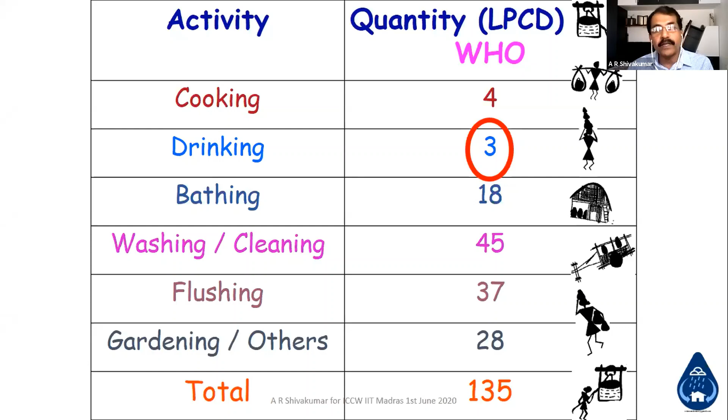We need to worry about approximately 100 to 135 liters per capita per day, and in particular 3 liters, which is for drinking, which needs to be quite clean in both quality and availability for every person on this earth. Of course, water is not just for human beings -- all other creatures on this earth will also share it.

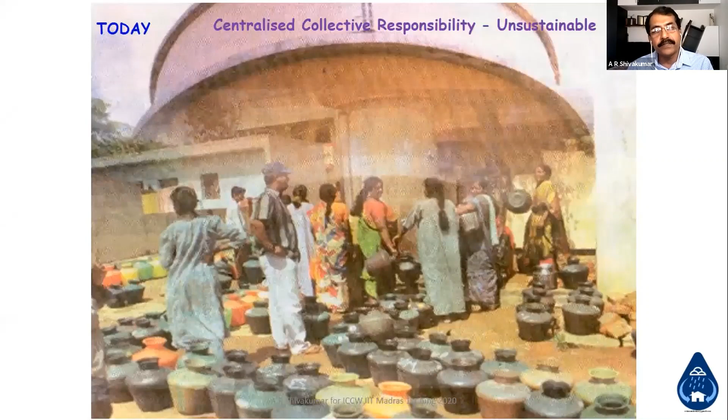This was what we had -- water was our own responsibility, and we used to go to the place where water was available. It was the most decentralized and sustainable system which we had. We moved on to large centralized systems as civilization grew, and many a time it has become unsustainable. Now we have water as a commodity, and in most places we have water dispensers or water ATMs, which we have already started seeing in most towns and even villages.

Is there something we can do to have a sustainable water supply and respect what we had earlier? Can we bring it back to that? Nature has given all the gift of water available to almost everyone, including all other creatures, and it's in plenty. We just need to manage it properly so that it is equitably distributed among all, where it is needed, in the required quantity and quality.

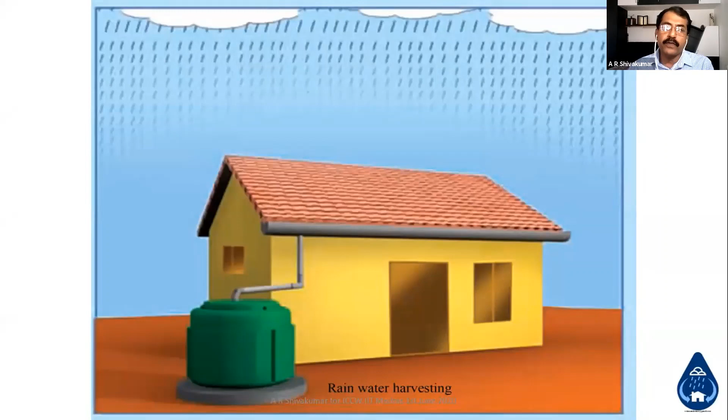Rainwater harvesting is as simple as this. We start with a collection place -- our own building roofs. The roofs are more cleaner compared to all other catchments we have, so we start with roof collection. Whether it's a flat or inclined roof, the water flows down; instead of allowing it to go out, we can collect it in tanks. Excess water, instead of allowing it to flow out, we can recharge to the ground. Why recharge? Because we have been using groundwater very extensively.

In particular in India, almost every place we have exploited the groundwater. Unless we recharge, naturally it was happening and now also it's happening, but the quantity of withdrawal is so high, we need to use artificial or accelerated methods to see that the water percolates into the ground.

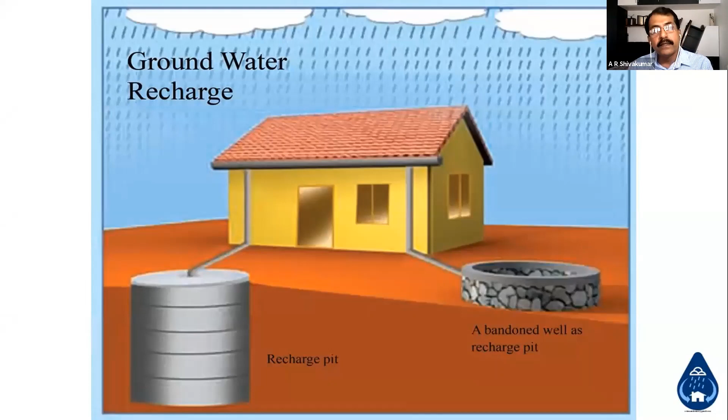An old abandoned well is a classic example. You allow your roof water to go into that, it will recharge. Or we can create one recharge pit or a well, which I will show you in future slides. And the rainwater would be the immediate resource to augment the existing water supply system.

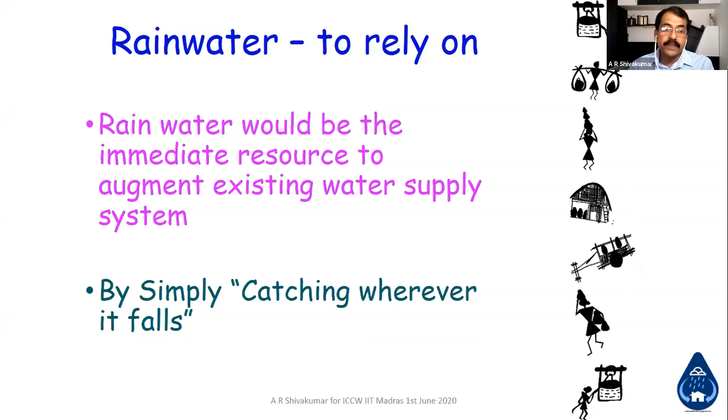We can't move away from the developments which have already taken place. We can see how we can augment and see that sustainably everyone gets water by simply catching where it falls. Rainwater harvesting methods, broadly we can divide in any of our civilized either urban places or in the rural places in 3 categories.

Rooftop rainwater harvesting, runoff from various places like landscapes, parks, stormwater drains, roads, etc. Here also we can harvest either for recharge or for reuse. Natural storage and collection through lakes and tanks or water bodies is very important. This will complete more or less the rainwater harvesting.

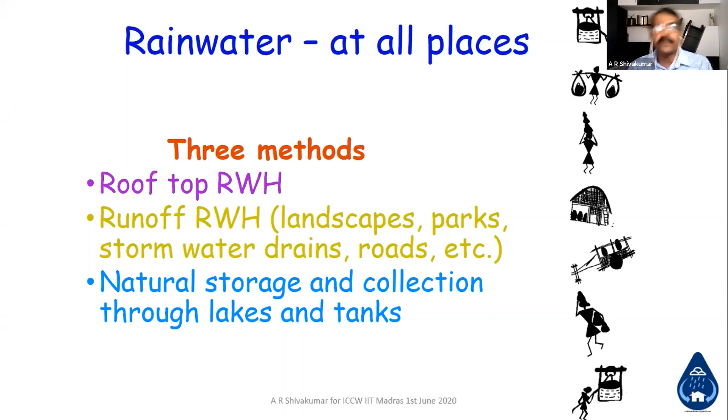Any rainwater harvesting system will have 4 categories of steps. One is the collection - we need a collection place, either a roof or an open ground or a park or a large industrial area. Then we need to channelize that so that we can filter and use it. Filtering is very important - depending on what kind of usage we have, we need to filter to that quality.

For just agriculture purposes, we just need to filter some debris which can flow through the pipes and pumps and the irrigation system. If you need to use it for drinking, it should be potable. If you are using it for industrial purposes, the standards are different. So filtering is something which is very crucial.

It plays a catalytic role to see that the rainwater, though it is pure, gets contaminated or mixed up with other contaminants on the collection areas or the catchment areas, and needs to be separated. Then afterwards you have 2 choices - one is store and reuse, or you can recharge to the ground. Or a combination of these things can be used so that partly you store and recharge to the ground.

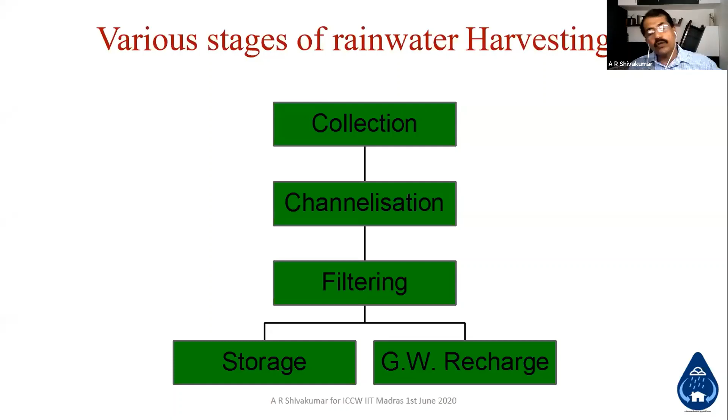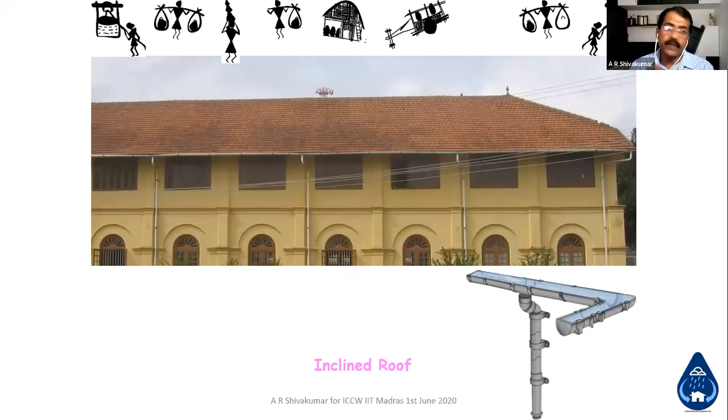We can store or collect it from an inclined roof also, whether it's a tile roof or sheet roof or any other inclined roof - we need to collect using gutters and pipes. Even the flat roof we can collect, bunch all those downwater pipes and take it to one place to collect.

And how much water can we collect? Simple calculation - basically you need 2 figures. One is the catchment area of the collection place and the rainfall of that particular place. If you want 1 year's total requirement, how much you can collect or the total potential, you just need to multiply the area by rainfall. Area in square meters and annual rainfall in millimeters will directly give you the liters of potential you have.

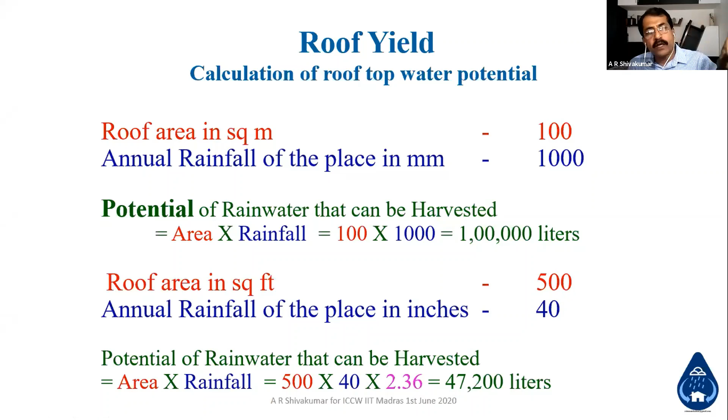In feet also you can do it - only thing is it should be in square feet, inches in rainfall, and a constant of 2.36 will give you the total quantity of water we can collect. Whether it's a small house, large industry, or a catchment area of several acres, the formula is the same. We need to bring in a factor called efficiency of collection, because what is potential and what is actual differs - what is potential is theoretically how much it can rain and how much you can collect from there.

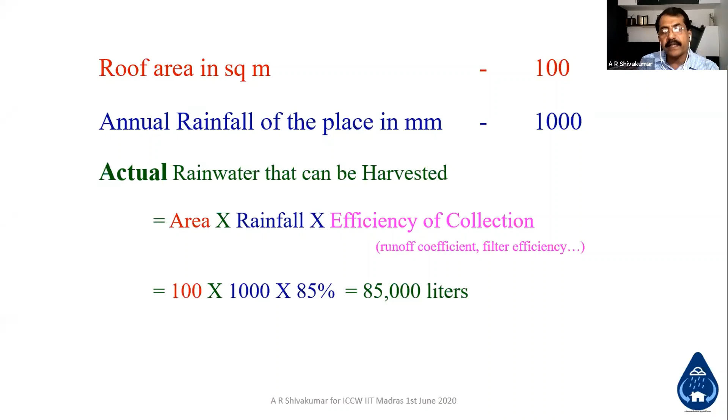Practically, where it comes to storage for direct use or for recharge, it depends on the efficiency of collection, like runoff coefficient, filtration system efficiency and all that. Roughly for a building with a flat roof or inclined roof, which is a hard surface, you can safely take 85% collection efficiency at this level.

For a small building, rainwater collection can be as simple as this. You have your down pipes, the water comes down. The first flush is very important. Once you remove the first 3 to 5 minutes of water from your roof, your water is almost clean. Then whatever debris comes can filter through a cartridge and come to your storage place for you to collect and use.

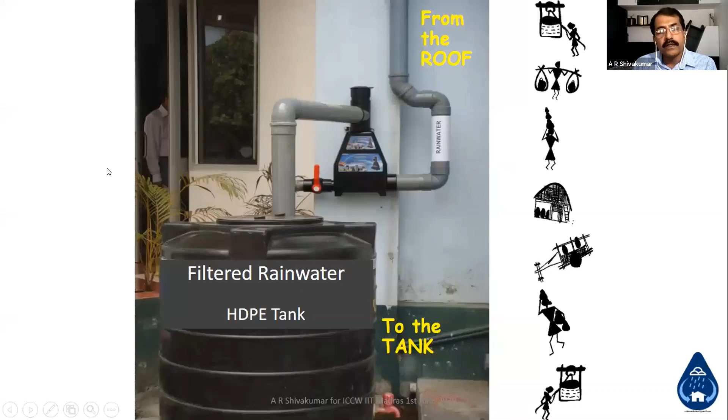As simple as this. The next slides will show you how simply you can collect from any normal building. You have a building roof and the down pipe, and the rainwater is flowing away. Just interconnect them using a pipe. Then connect a filter which will remove the dust, bird droppings, and leaf litter that have fallen on the roof. The water is then diverted after filtration into storage. That's all you need to do. Very simple, anybody can do it.

Whether it's a multi-story building, an apartment, industry, or any other such building, here the system required needs you to know the total quantity of water flowing. So we need a little hydraulics to worry about flow rates, pipe size, filtration system size, and what kind of filtration you are going to use. After that, you can also store and recharge groundwater.

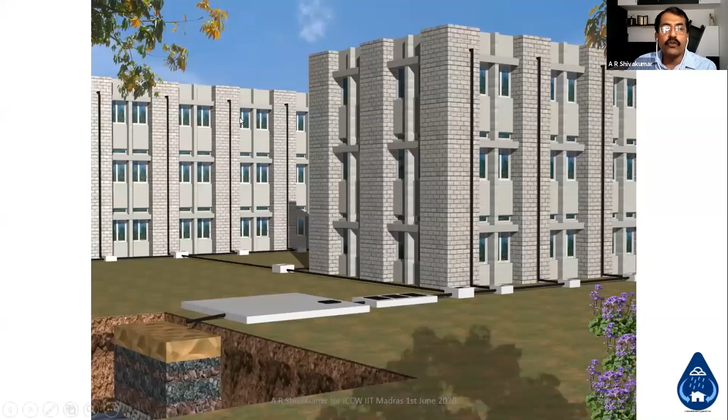A simple diagram can show you. Basically, the rainwater has to flow by gravity from the collection place to the storage or recharge point. So choose the place of filtration and storage at the lowest portion of your project, house, or wherever you want to do rainwater harvesting, and systematically lay the pipelines with a gradient so the water flows down, with a high volume filtration system for large buildings, and then storage.

I have developed both a domestic pop-up filter, which is serving across the country, and a totally automatic system for very large scale systems, which I have also demonstrated. This is for a very large system, like government secretariat buildings, large hostels, airports, or the IT sector, where large quantities of water are brought to one place. We have a totally automatic filtration system which I have developed, called the first flush lock and diverter.

Later it stores in the tank. What it does is, every time it rains, this particular tank stores the first few minutes of rain, maybe 3 minutes, with all the contaminants, and there is a lock which locks by itself automatically and diverts the subsequent cleaner water through a pebble bed filter into the tank.

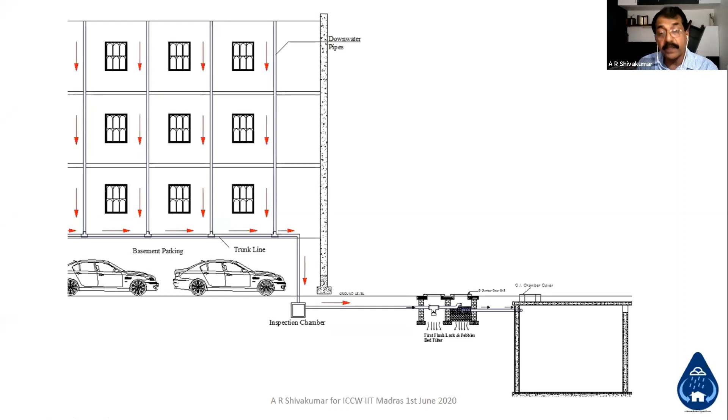How is this automatic? Once the rain stops, all the dirt and water stored in this first flush lock percolates into the ground, because the bottom is not concreted or cemented. The valve opens, and it's ready for the next day, or after a week, or after a month, whenever it rains again. It's totally automatic - you don't need to clean or do anything. It's working very well at various places, including all the hostels of Anna University campus in Chennai and various others.

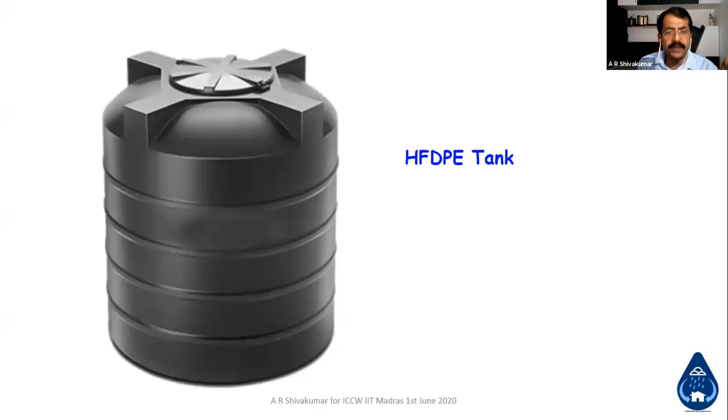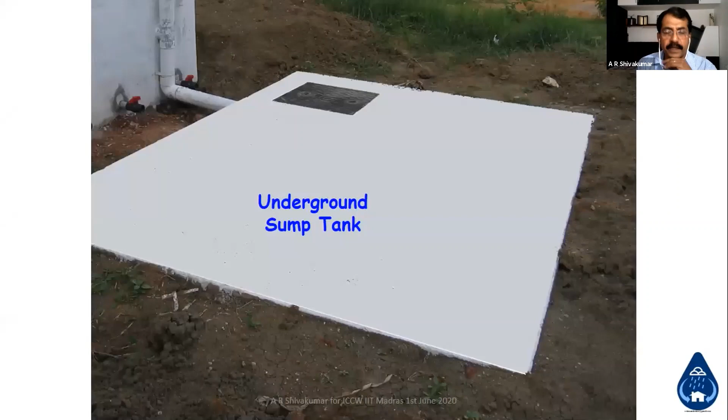Storing rainwater can be done in various forms. One is the HDPE tank, which is simple but can store up to 5,000 liters. Beyond that we need to go for either a masonry surface tank or underground tanks. These can be built using brick or cement concrete. I was part of a very large program in Karnataka where almost every rural house is being built with a rainwater harvesting system.

What we have given is basically a collection system and a first flush valve. Then we have a sand bed filter, and the water goes through this. Below this we have a jali where the water percolates into the tank after filtration. This tank is totally sealed so that the water stored in it is not exposed to the sun.

Even after several months, water is safe to use and they are using this. I can say this is the happiest family. They generate their own water from their rooftop, get it filtered, store it here. They have the cleanest form of water. This tap has a lock so that every day they withdraw only around 10 to 20 liters of water for drinking and cooking. Otherwise, they use hard water or contaminated water available from borewell and various places.

Even in large-scale school programs we have done this, where the roof water is collected, filtered and stored for drinking purpose in the school. Now let's come to groundwater recharge.

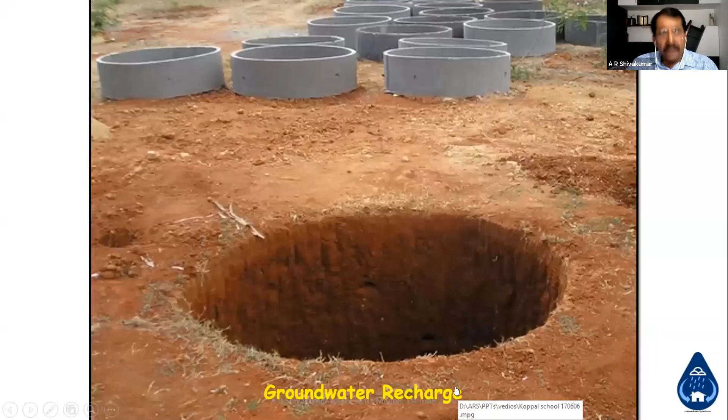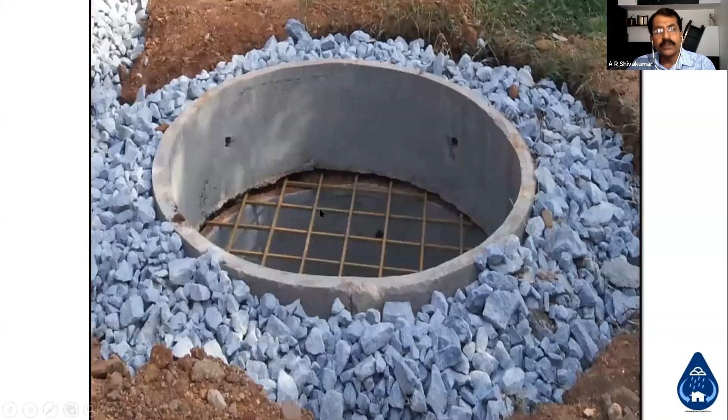Groundwater recharge is a very simple process. We dig a hole in the ground and we have precast cement ring wells. This is the cheapest and best method we have seen. Of course, depending on the region, there are different methods adopted. We construct a well using these cement precast rings, with no plastering between two rings, and a safety mesh at the top before the last ring is placed, with a disc over that.

We allow the rainwater to go inside this if it is filtered. If it is surface flow, we allow it to go into the annular space. So what we should observe is this entire well is empty - there is nothing filled in that. No filter media, sand, charcoal or aggregates are required. We only need to worry about the annular space outside, which is filled with aggregates.

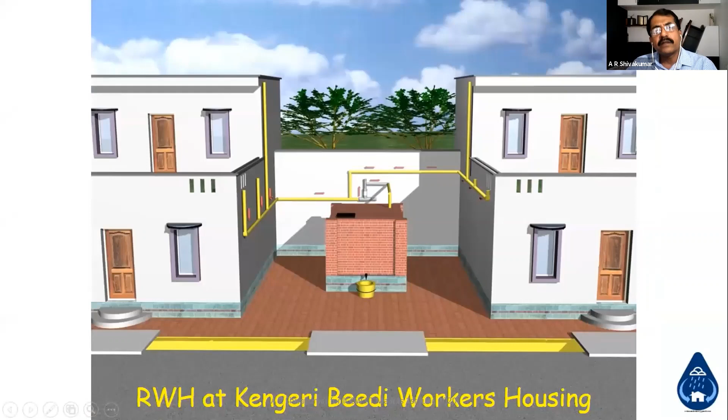Even in large economically weaker sections, slums and other places, rainwater harvesting is practiced. We collect the roof water, filter it, store it, and use it for drinking purpose and everything.

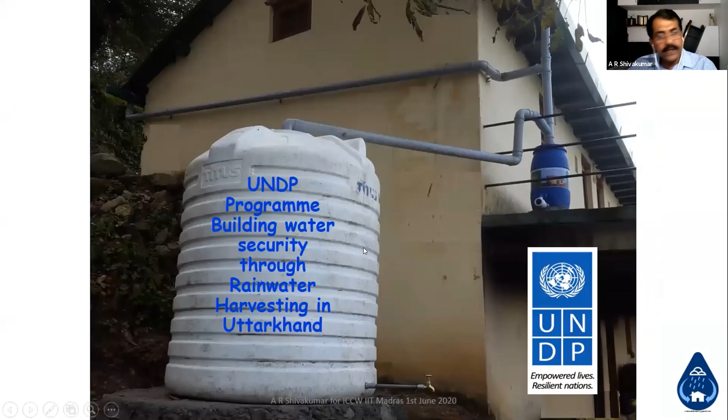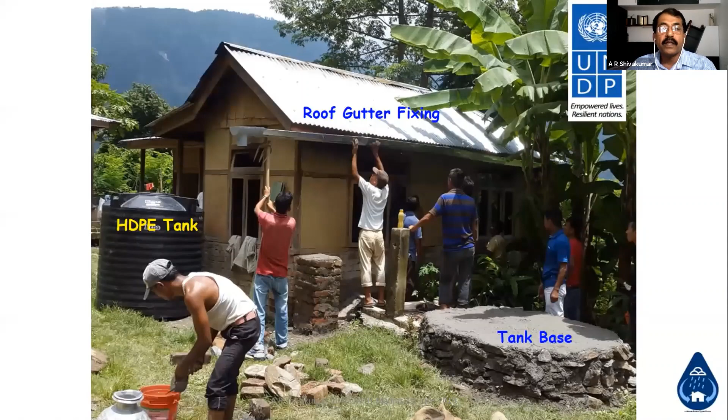As part of large programs with the United Nations Development Program across the country, in Uttarakhand we have developed systems in the Himalayan region and other places where roof water is collected, filtered and stored and used for drinking. We have trained skill development programs to impart training to those people so they can build this on their own. These are the happiest moments, when these people have found water just beside their house and use it throughout the year for drinking.

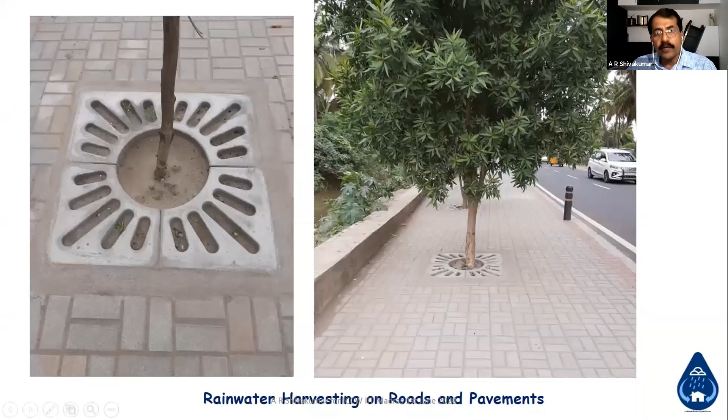Rainwater harvesting is not complete only with buildings - tree-based basins can also be part of pavements like footpaths and others, where percolation can happen. It can be as simple as collecting water with a dhoti or a sari on your rooftop. This is the purest form of water you can get.

Let us see how practically we can do this. We have developed an app in collaboration with the United Nations Educational, Scientific and Cultural Organization, UNESCO. I spearheaded this program in collaboration with the Indian Institute of Science Supercomputer Division and NMIT. We have developed an app, and today I'm going to demonstrate this app and how it works.

Basically, this app stores a large amount of data, which is the daily rainfall data of that particular place - 586 towns and cities across the country, from the northeastern states to Kanyakumari, western places, and north too, all collected from the IMD. That data is stored in the supercomputer division of our IISc. That, plus the software working in the background, gives you all the necessary inputs at the click of a button.

This is the app called RWH Advisor. Basically, we need to enter only a few things, very little. Anybody can enter it - your name is optional. For example, Chinnaswamy is from India, in Tamil Nadu, and you enter the district, and if you know the taluk, you can also type the taluk. If you enter this, automatically the entire view shifts to that particular place.

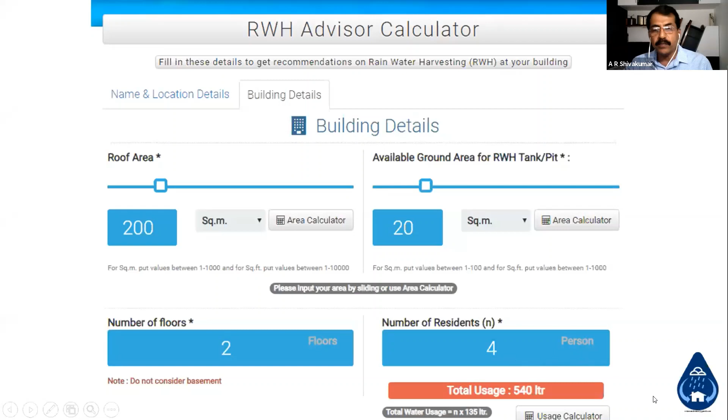This Erode, when we click on the button with these details, will give you this data. These are the results - this will show you the rainwater potential in that particular place where we clicked is 133,000 liters in the roof area of 200 square meters.

And the suggested most optimum tank size is 10,000 liters. If you build a 10,000 liter tank, in a year you can collect, with an efficiency factor of around 85%, close to 60,000 liters of water. For 111 days, it can say that you don't need any other water - rainwater alone can sustain you.

30% of your annual requirement is met from rainwater by having a 10,000 liter sump. 8 days in a year your sump will overflow - this will also show you when it overflows.

It predicts basically how it has behaved in the last 50 years of rainfall in that Erode or whichever place you have taken, then works on that. There are around 40 rainy days in that place. It also shows that the excess rainwater overflow can be put into groundwater recharge.

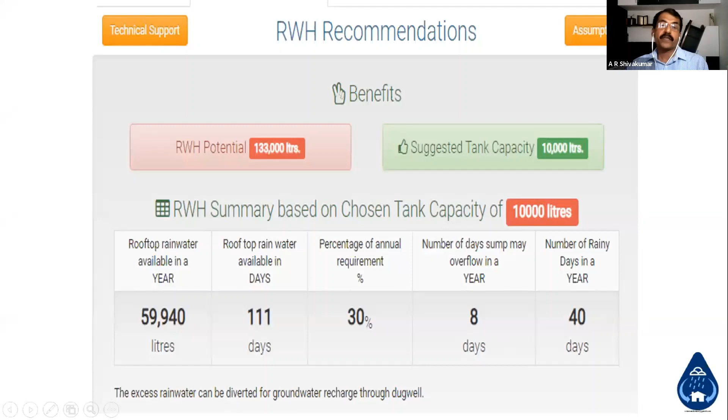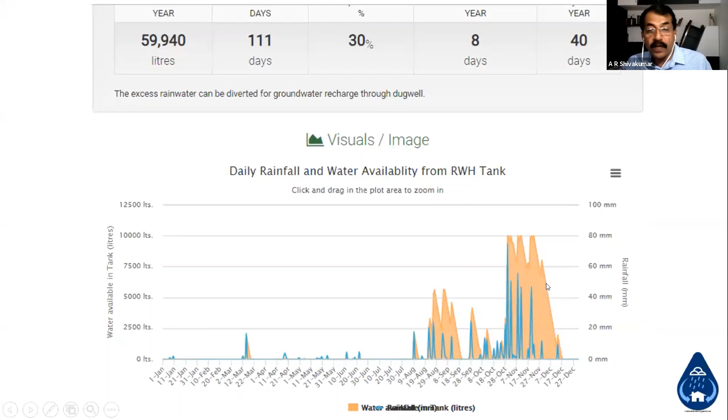And it will also, when you move on to the next, show you what tank size has been suggested. In this tank size, how many construction options you have.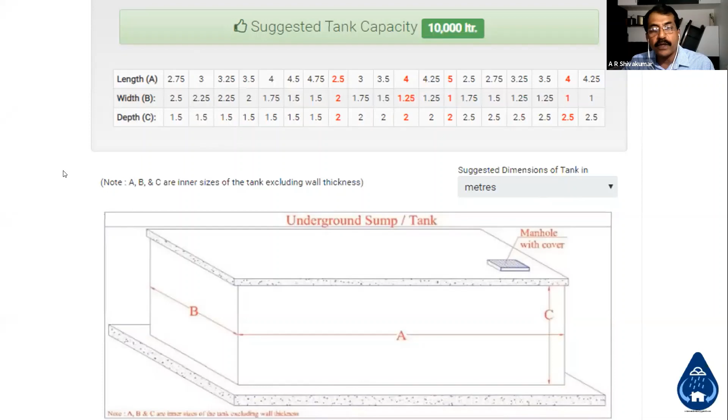Now if the tank size suggested is 5,000 liters or less, it suggests you should not build - it's not required. You can go in for an HDPE tank, which is cheaper, like 5 to 6 rupees per liter. Otherwise, if you go for brick masonry, which is between 5,000 to 25,000 liters, only burned brick chamber construction can sustain, up to 25,000.

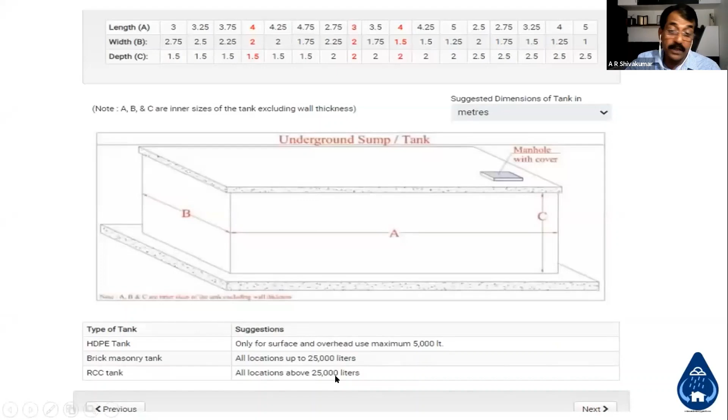Beyond 25,000 liters, you need to go for RCC tanks. This is what the app suggests, and afterwards it will also give you the cost.

This cost is basically derived from running through several costings across the country in various places. Some things are very standard, like pipes and filters, but labor varies a little. Depending on that, the app chooses the data from its background and starts working.

The number of downtake pipes is 4 in this particular building for that area. 110 millimeter is what is suggested. If they use bigger or smaller, I think this will be the right one as per the Indian building codes.

For the number of filters required, I have taken the pop-up filter which I have developed. There are many other brands which can be used depending on the manufacturer's guideline, what size of roof it can handle and how much water can flow through that. You can figure that into the design and factor it in.

The tank cost will give you how much it costs. The brick masonry tank is approximately 9 rupees per liter, around 90,000 rupees. Then the piping cost for the number of floors we've chosen, the total pipes, and the filters, plus the labor cost, comes to approximately 1,25,000 rupees required for this.

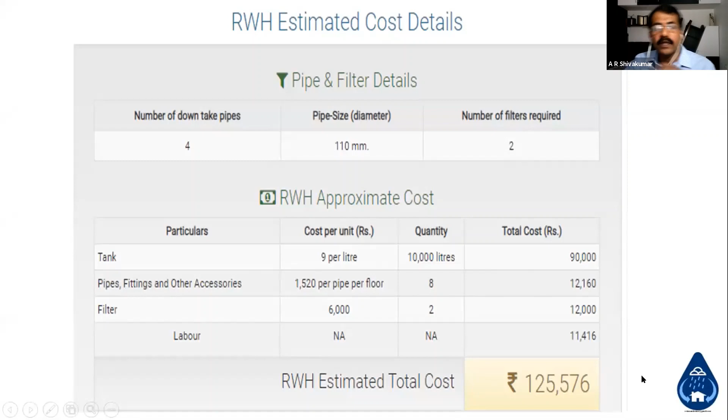Next, you have many options. If you go back to our earlier slide, I showed you the option now for storing and reuse. You can see this button in our app. If you choose store and reuse, as I said earlier, this navigation will come up and you can choose.

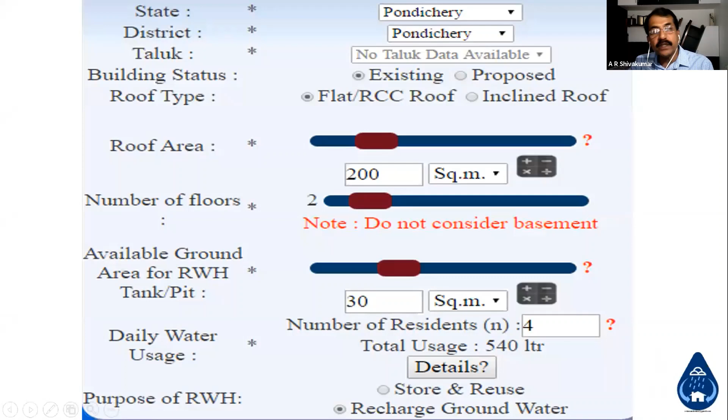Suppose you click on recharge, if you don't want to use the rainwater directly, you can go to recharge groundwater. This option will come up, and once it does, how to recharge it depends on the place, the particular soil structure, and various other parameters like porosity and so many other factors.

There is also an important note we have given: do not attempt groundwater recharge at these 3 places. Where the groundwater level is already 5 meters and above, there's no point in recharging since it's already high naturally. Hard rock strata where water cannot percolate. And selected regions in low-lying, flooding areas. Don't do rainwater harvesting or groundwater recharge in these 3 areas.

Suppose it is conducive to do rainwater harvesting for groundwater recharge, you can use structures like this. This particular area we chose, this is the structure we have suggested: basically an open well using precast cement rings, nothing filled inside, only in the annular space, whatever the gap is, fill it with aggregates and then start.

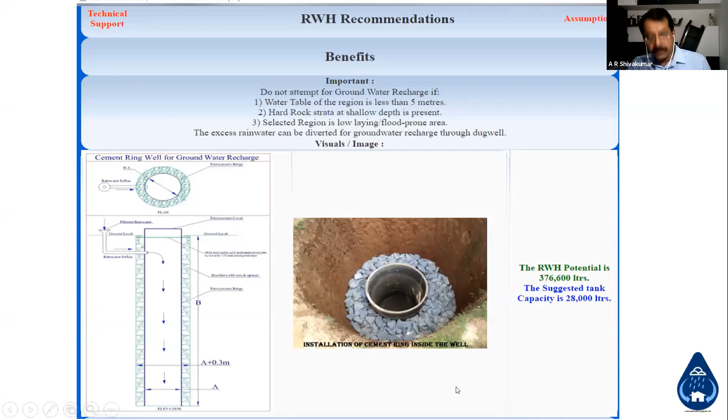The potential is 376,000 liters in this orientation, how much it can go into. We've also worked out the costing here, depending on the digging cost, labor, pipe fittings, the cement rings, how much they cost, the filtration system, labor, and all that. This is the cost you can get.

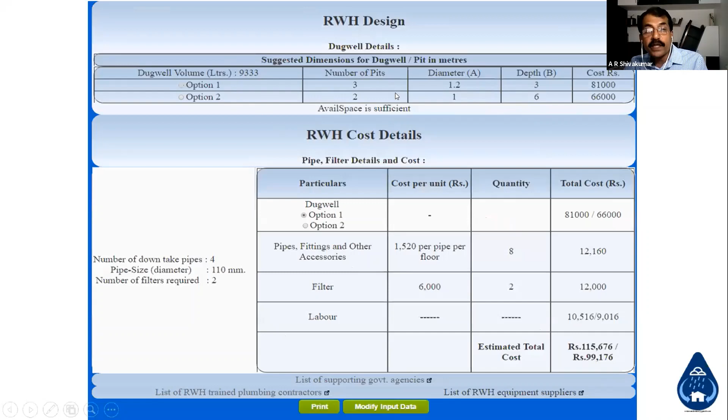Here again, we have 2 options depending on the hardness of the soil. Either you can go for 3 numbers of pits, 2 numbers, or 1 number, depending on that, it will suggest. This is the graph which shows how much water can go into that.

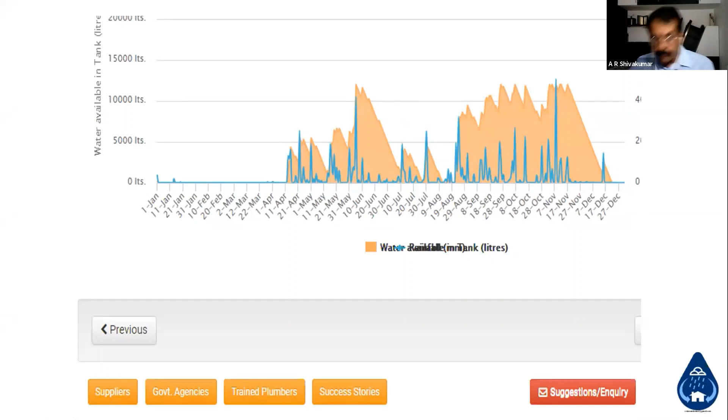Then we have several buttons to show what we can do with this app. There are these buttons at the bottom. Suppliers - you click on this supplier button for that particular place, and there are some enlisted sellers of tanks, pipes, rainwater filters, and various other things available.

If you go to the next one and click the button, you can see the government agencies involved in doing rainwater harvesting in those areas, along with their phone numbers and other details. If you scroll down, there are many entries. We have also enlisted plumbing contractors or trained people available in that area.

Here, I've taken Bangalore as an example. I myself have conducted more than 200 training programs for architects, engineers, and others, and in total we have conducted 800 of them. Around 2,000 trained people are available across 290 pages we have here. If you type the area of the place, you can get the plumber list and choose any of them.

You can choose, ask them with a mobile number, email address, and other things are also available. So this app is available for you. This is readily available on the net.

There were some issues regarding the hosting of that. Maybe it will shortly be resolved. It's called RWH Advisor. Now we can go live on this and then share it.

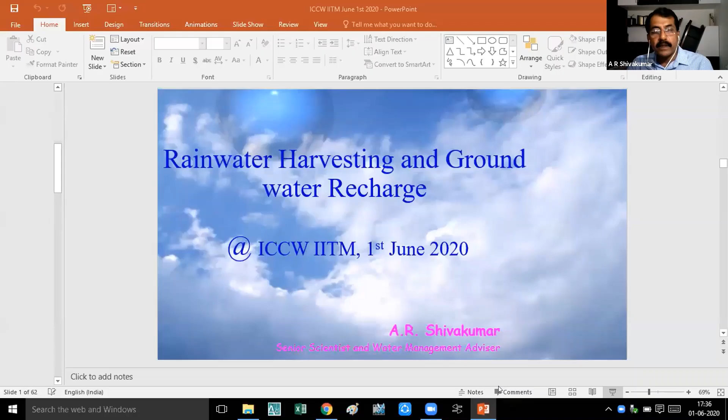Yeah, I will show the live video. Before we go live, Mr. Shivakumar, we have been receiving questions on the app in terms of where it is launched, how it is launched. I'm not finding it in the Google Play Store and all that.

Yeah, I told you this is as of today. There are some issues of the hosting. It will take maybe another few days time to do that. Let me complete my presentation, Sripati. So the questions which are asked are already answered in my future slides, because I'm going live now.

This is live now. For example, you can go into this app. I'm live now. So here, okay, I'll take example of Sripati. So India, then select the state.

This is select the state. I will take Sripati from, and little selfish, I'll take him from Karnataka.

Okay, Bangalore urban, Taluk Bangalore south. This is what we need to select. And then say Sripati's house is an existing house and he has a flat roof, and then you navigate next.

Yeah, this will come. And here again, depending on the roof area, you can either enter here, or you can bring this tab to the slider to any place. For example, you can come to under here, say, to enter.

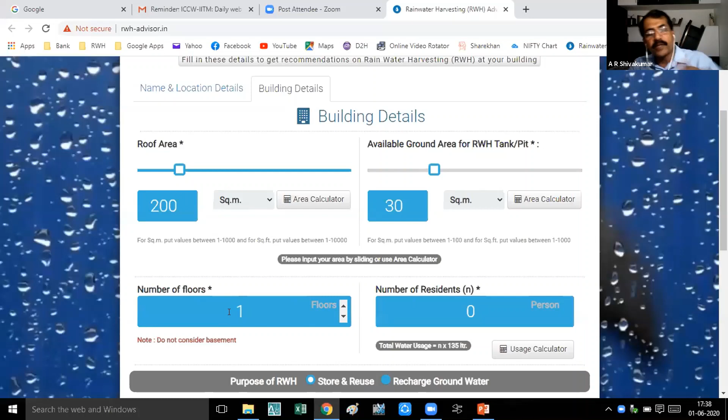You can take number of floors. You can say how many floors your building has, and the number of residents. Sripati is a small family, say 3 people. They use around 405 liters per day.

You can change the number also. If you go here, usage calculator, you can enter your number, either 500 or 300, so that the entire software takes that number.

Now here you have 2 options. One is store and reuse, or recharge. First go to store and reuse. Then you just click. This is all what you need to do.

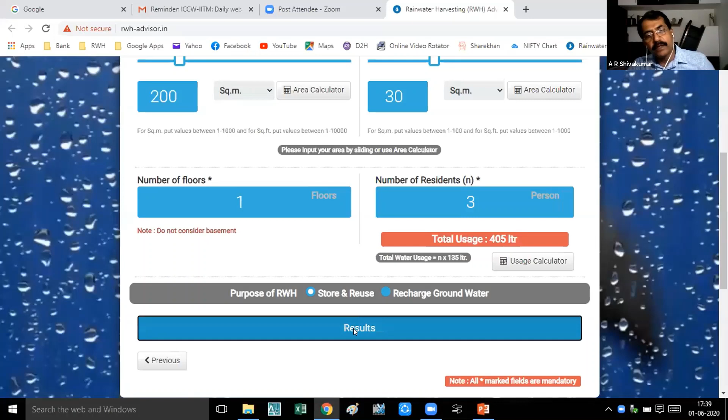Only your roof area, your place, how many people are there, and what is the number of floors you have. If you give this, the entire thing, the software at the background will come, and immediately, instantly all the results will come. Yes, this is here, Sripati, Karnataka state, Bangalore urban, Bangalore South Taluk. So your house is located here, the existing building, RCC, then the catchment area, what is the place available, and the 405 liters per day you are using.

Yes, we go into the suggestions. What the software has suggested is recommendations. Sir, you need to build a 12,000 liter sump or a tank. 12,000 liter tank will be most optimum. You can build a bigger one also.

I will come to that later. You have the potential of 1,58,580 liters on your roof. With this 12,000 liters, you can harvest close to around 99,000 or 1 lakh liters of water, 98,820 liters, with an efficiency factor of 85%.

Then the rooftop rainwater is available 244 days in a year. You don't need any other water by just 12,000 liters, and in Bangalore South, with the rainfall water, 67% of your annual requirement is met out of rainwater. Your sump is likely to overflow for 8 days in a year.

I will show you which day also, because it predicts based on the historic data. In Bangalore, in this particular site where we have chosen, it's around 75 rainy days which we get. The excess rainwater can be pushed into groundwater recharge also, it suggests.

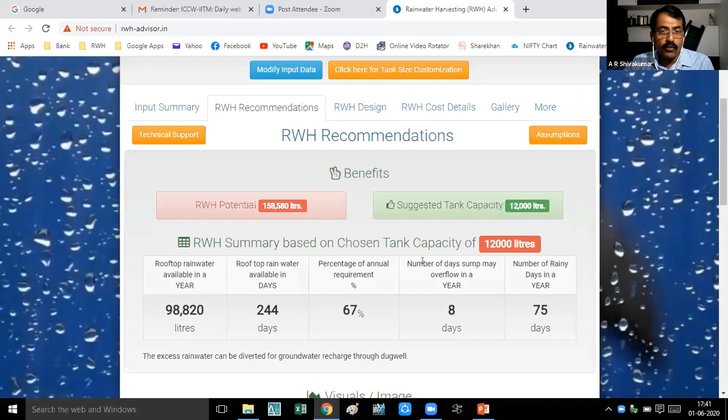Then this is an interesting graph what we have done. This has from January 1st to December 31st. This side we have the tank size, or the total quantity of water which is stored in your tank. And this side it is the graph that shows how many millimeters of rainfall which has happened. For example, you hover around your mouse at any place. For example, I come here.

This is 23rd August. Water available in the tank is around 2,587 liters. Rainfall on that day is 5.5 millimeters.

So you choose any date, it will give you the data. This is, you see, tank is overflowing here, 11,990 liters of water.

8.9 millimeters of rainfall. Previous day it has rained, that's why you see on 8th November it has rained 50 millimeters, 50.9 millimeters, and the water available is 12,000 liters. The tank is overflowing on this day.

Like this, you can see that taking historic data, more or less it has worked. In the last 10 years we have tested this software, and in most of the places the behavior is same, unless there is a skewed result in your rainwater harvesting rainfall data.

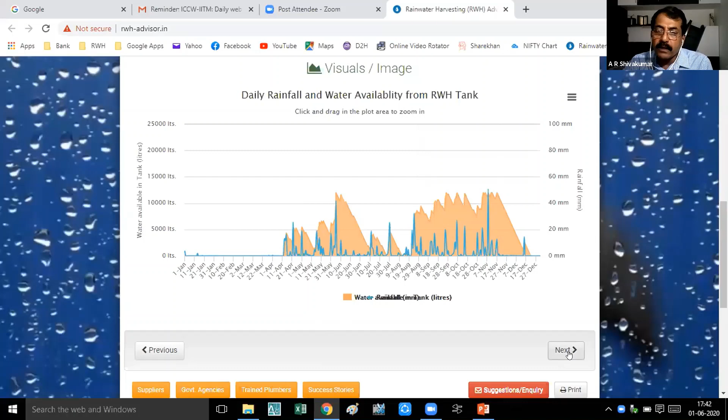Next, if you choose, it will show you the size of the tank. Here again, you have feet or meters. This is 12,000 liters, length, width, and depth.

These are the numbers from the inside of the tank, the internal dimension of the tank - what is the width, what is the breadth, and what is the depth we have. The most optimum would be something like this, shown in this red mark, or you can choose any other depending on the open space available.

You can choose instantly, it will change to feet if you change. You see here, instead of meters, it will show you what is the feet - around 13, 5, and 6.5 feet. This is the dimension of the tank.

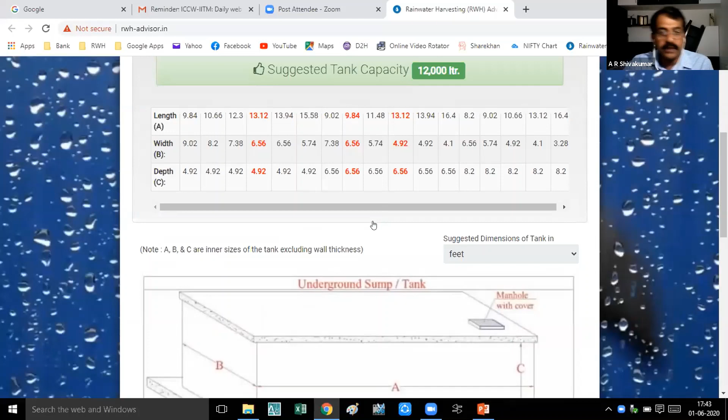It will suggest, as I told you earlier, if your tank size is say 12,000 liters, you need to go in for only masonry structure. That will be the most suitable for you.

Then next, if you choose, it will show you various other factors. You can come back also, like for example it will show the cost. Here, the cost is based on that particular place, availability of material, how much it costs, and the labor. Certain survey we have done based on that. Some numbers we have plugged in, and then it takes up the numbers which are already prepared.

The number of downwater pipe sizes, the number of filters required, the tank cost is so much, the piping cost is so much, the filtration cost, filters number 2, the labor cost which you have taken - 1,38,000. This includes the tank cost also.

If you already have a tank available, maybe 10 or 12,000 liters, the cost of the tank, which is the bulk of the cost, will go down, and you will have just approximately around 30,000 rupees cost for this. Yes, this is how you can go for groundwater recharge.

You won't store - I will come to that later, but I can show you live how this can also happen with various other factors. One is suppliers.

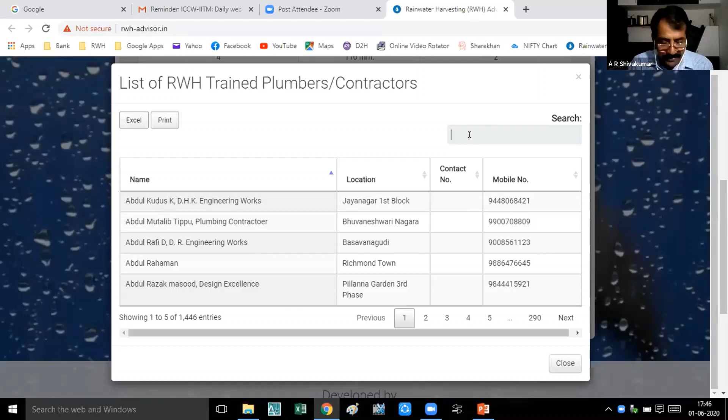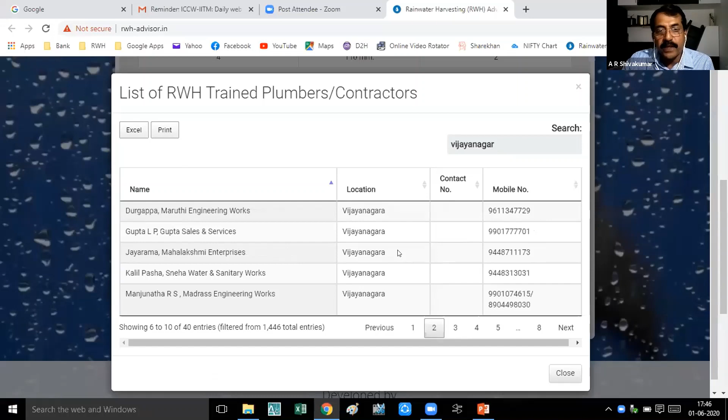In Vijayanagar, you see there are already so many people available who have been professionally trained and know how to do rainwater harvesting. They are plumbing contractors, architects, engineers who have taken up rainwater harvesting as a profession. Their mobile numbers are available, and you can go to various other pages to see several such people listed.

This app takes this data, but in many other states this data may be missing in the app because we have tried our best to get it from government agencies or other agencies involved in rainwater harvesting. They have not provided the data, so it may be empty in those areas. We have also provided one more option.

For example, let's go back to see what options we have for groundwater recharge. I think we need to modify the input data here, instead of plain roof.

I showed you these two options: one is store and reuse, or you can go in for groundwater recharge. These are totally different results now. The primary data remains the same, but it will show you what you need to do about groundwater recharge and where you should not do it. All these options will come.

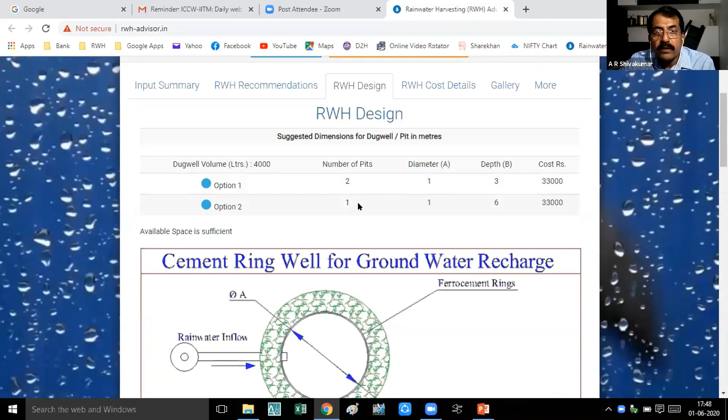Assumptions and other things are also here. You can click on that and see the porosity and various other parameters available. These are the drawings available. You can see option number 1, the number of pits, diameter, depth, and how much it costs. Option 2 has the same, but only one pit because the depth is higher, this one is 6 meters. The dimensions and how to build all these are available.

So these are some of the options, and here again the costing will come. In a similar fashion, the costing is also worked out for groundwater recharge. Let's go back. There is something else also I want to show you. The basic parameters remain the same.

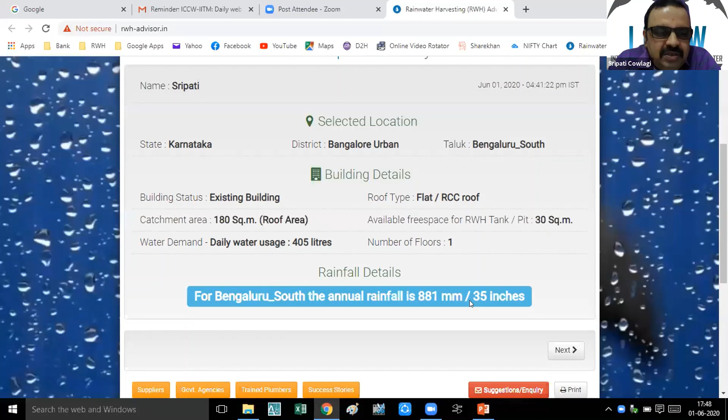I am almost done. I will end the session now by showing one more option: you can modify the input data if you want to play around with storage results. For example, if your cost is higher and you feel you can't afford a 12,000 liter total sump capacity, you click here and go for optimizing your tank. You can play around with that and change it, and see how it changes accordingly.

Okay, this is the app which we have developed, and I think I can go to the presentation mode now.